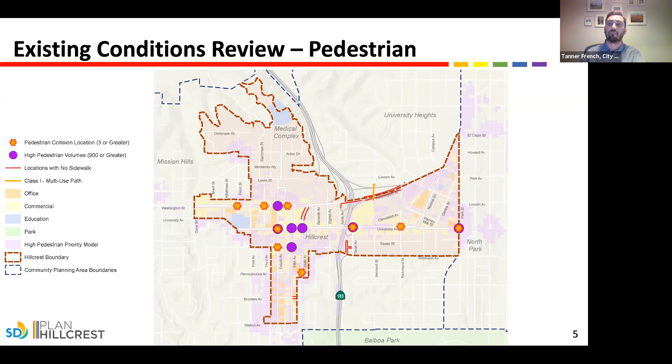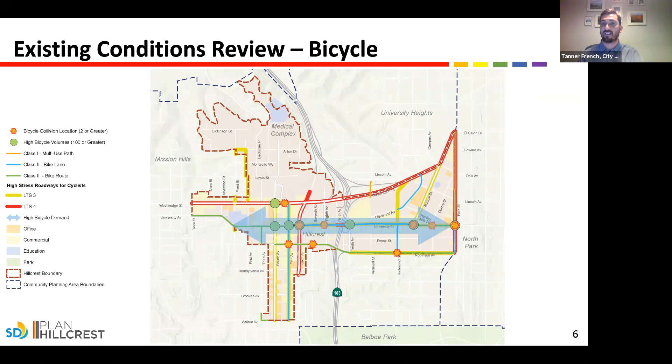Similarly, for the bicycle mode, understanding locations where collisions are occurring, the high propensity for bicycle activity, and where the network may be lacking, but also understanding where other entities like SANDAG are planning and implementing bicycle facilities, so that'll best inform our plan. Next, for the vehicular mode, the existing conditions again will help us identify locations where collisions are occurring and where there's traffic congestion.

Also, existing conditions identify roadway typologies, which help us determine an appropriate long-range makeup. For instance, the characteristics of Washington Street, the large width, the grade separated intersections, the lack of fronting land uses, all help inform ideas about what its future best makeup is.

Chen Ryan staff will delve deeper into that topic later in the presentation.

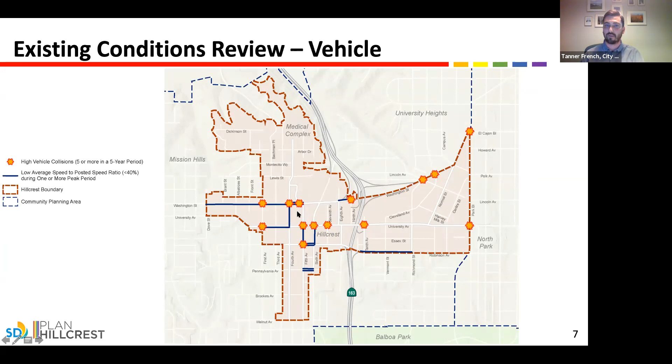Transit is a bit more complicated, given the fact that another entity, SANDAG, plans regional transit, and yet another entity, MTS, operates transit. But a similar process is still used. We look at key metrics like ridership propensity, traffic congestion, and walkshed to inform our future plan.

In this slide, you can see that nearly the entire community, with the exception of a portion up by the medical center, is within a quarter mile walkshed of transit. This means that transit can and should be a viable option for this community.

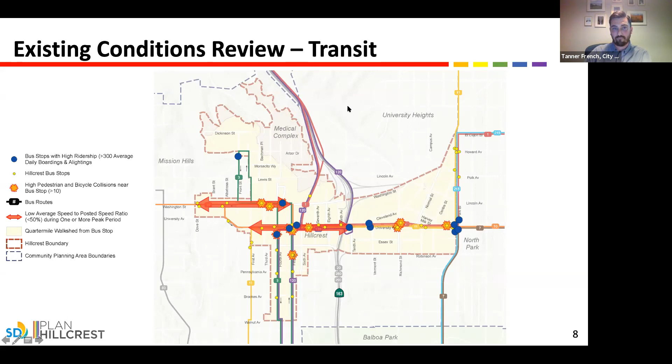This slide depicts planned transit in SANDAG's draft regional transportation plan, which is currently being updated. Along with many of the same treatments, this includes the possibility of a commuter rail, a much more intensive infrastructure. This would have a completely different set of implications regarding how other modes fit in the roadway network and what would be needed at the transfer nodes.

It'll be our job to communicate with SANDAG on this issue and make sure our plan reflects the likely outcomes of their plans and making sure that they're cohesive.

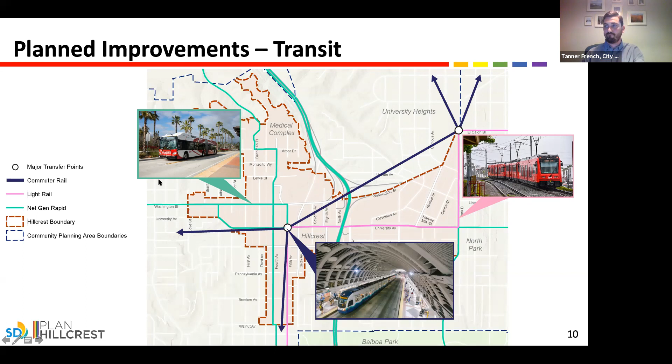With that, let's transition into the mobility approach portion of the presentation. Although each plan update is unique and will be tailored based on unique factors for each community, fundamentally and from a policy perspective, our process is relatively uniform. At its foundation, the mobility planning approach looks to achieve goals identified in other city policy documents.

These documents include the Climate Action Plan, specifically by reducing vehicle miles traveled and shifting commute mode share away from single occupancy vehicle and towards transit and active transportation, thus reducing greenhouse gases. Complete communities, specifically by identifying and prioritizing funding for active transportation improvements in communities that need them most. Vision Zero, specifically by creating modal networks that are safe for all users, including those that are most vulnerable. And finally, the city's general plan and current community plan, where applicable.

With that understanding of the basis of our approach, I'll pass the presentation over to Monique Chen from Chen Ryan and Associates. Monique will start by covering some of the more technical aspects of the mobility planning approach.

Before I pass off, I just want to note that the options and concepts we're going to be showing tonight are at a high level and are just for the purposes of this preliminary discussion. A lot of vetting, coordination, and analysis will have to occur before any of these options would make it into the plan. So with that, I'll pass it over to Monique.

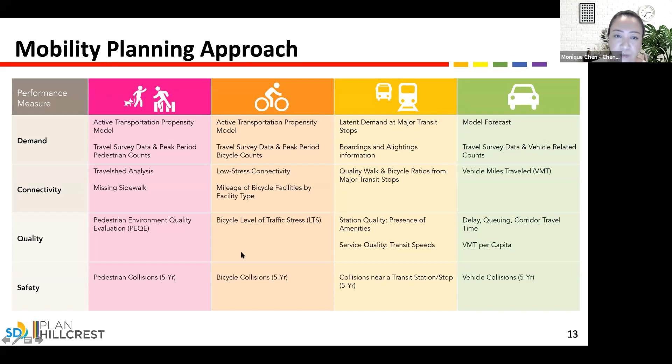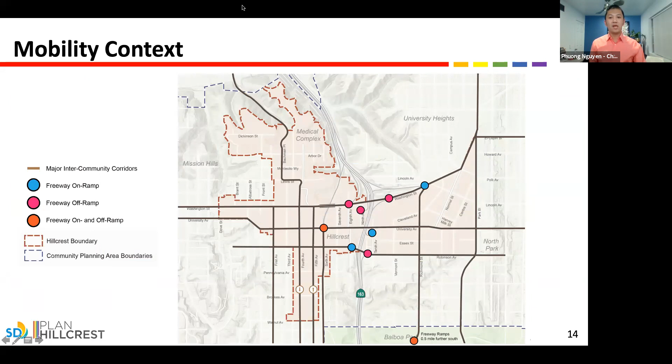Building on the previous slide and the matrix, in order to develop a concept, we look at Hillcrest's network as a whole. As you can see on your screen, we have a grid network in Hillcrest, but it's a very limited grid network with 3 major east-west streets and about a handful of north-south streets, with a few on-ramps and off-ramps focusing primarily along SR 163.

First, we'll look at the north-south streets. There are 3 major corridors that we considered that would provide vehicular access throughout the community, and also inter-community to other communities and freeway access. First, we have 6th Avenue, which provides freeway access and also access to Bankers Hill and downtown San Diego. Whereas Richmond Street provides access to Balboa Park, primarily for residents who live on both sides of Richmond, and also some freeway access via a ramp on the southern side of the road.

Park Boulevard itself provides transit access and intercommunity access, including the existing BRT, but also the planned BRT line straight up and down Park Boulevard, connecting the community to University Heights and further south to downtown. 4th and 5th Avenue we're not discussing because they already have a lot of active transportation facilities in conjunction with the light rail being planned in the draft RTP, so we'll go with the regional plan for those.

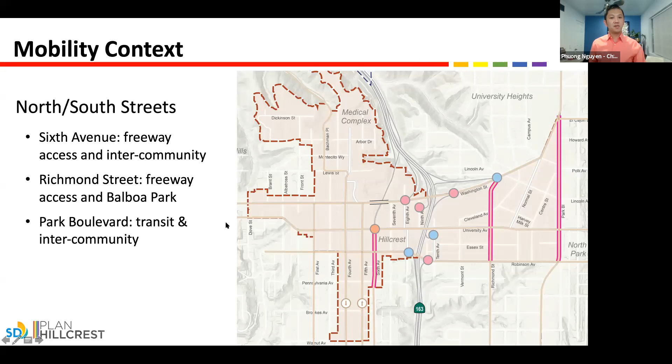In terms of east-west streets, we have 3 major corridors. Washington Street is primarily very vehicular oriented. It has very few facing businesses, a few shopping centers that need full driveway access, and very few front-facing development.

University Avenue, on the other hand, is an active commercial corridor with existing bike lanes as well as high demand for parking and a lot of businesses that operate throughout the day. Whereas Robinson Avenue is designed more like a slow street, focusing on just residential access, multimodal access, but not so much transit.

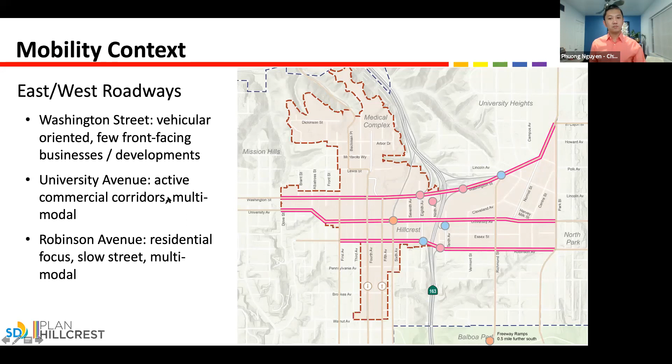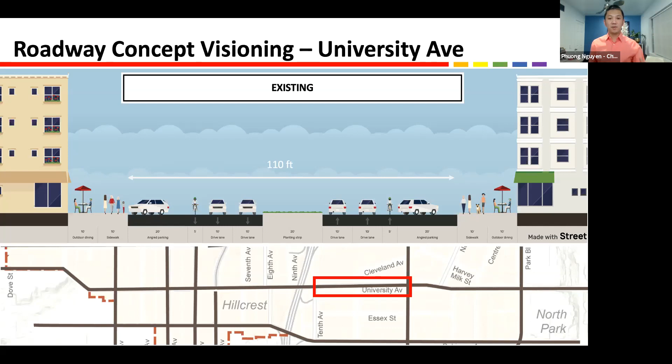In order to evaluate the potential concept today, we'll focus on University Avenue, the section between 10th Avenue and Normal Street. This is also the widest section of University Avenue, with 110 feet curb to curb within certain segments.

Under the near-term conditions, SANDAG is planning to construct a one-way cycle track on both sides of University Avenue, by inching the diagonal parking closer to the vehicle lane, basically doing a swap of the existing condition to provide a safer environment for cyclists. Under the grading criteria, all of the modes remain the same as existing or near-term conditions, with the exception of bicyclists, who see an increase in the quality of the facility.

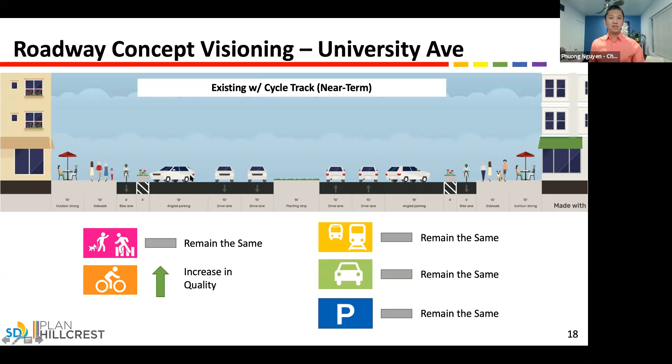For the next 4 options, which aim to maintain the existing vehicular access along University Avenue, under option 1 we would provide light rail or BRT access along the center line of the road with cycle track on both sides, in exchange for converting diagonal parking to parallel parking. Both bicyclists and transit see an increase in quality, whereas there's a slight decrease in parking availability.

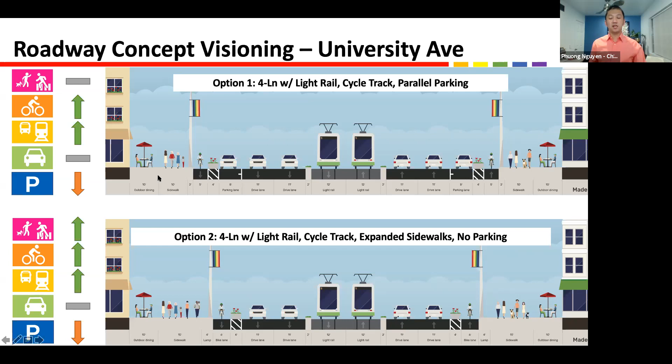Under option 2, it's very similar to option 1, but in exchange for removing parking along University Avenue, we are now able to increase the width for sidewalk and outdoor dining on both sides. Cycle track and transit access still remain the same as near-term conditions.

Option 3 seeks to maintain a balance between all modes. However, when you try to maintain all modes, there is quite a bit of exchange. Parking will be converted from diagonal to parallel, bike and transit will share the same lane, such as the implementation on El Cajon Boulevard right now, and the number of lanes for vehicles remains the same as near-term conditions.

Finally, under option 4, we would provide a transit-only lane on both sides, still providing cycle track, but in exchange parking would need to be removed along both sides of University Avenue. So under these 4 options, there's quite a bit of trade-off between all the modes, and that brings us to our next slide, where we look forward to your opinions on these 4 options.

As the poll pops up, I'll just go over the options again. Option 1 would convert diagonal parking to parallel, and in exchange we gain additional space for an exclusive transit lane. Option 2 gains more space for pedestrians, but we remove parking on both sides. Option 3 is a transit and bike share option with parallel parking; this is the option where we seek to balance all modes, granted not all of them are quality facilities. Option 4 would remove parking to provide spacing for cycle track and an exclusive transit lane.

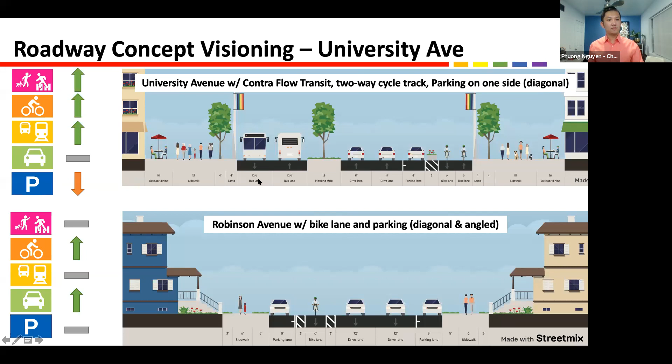Next slide, please. And it's time for the next poll. We would like to see how you feel about the couplet concept.

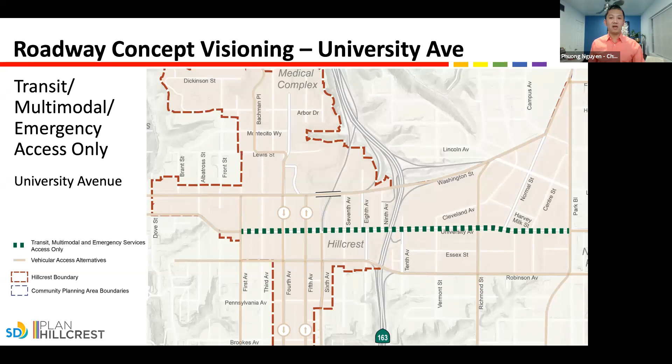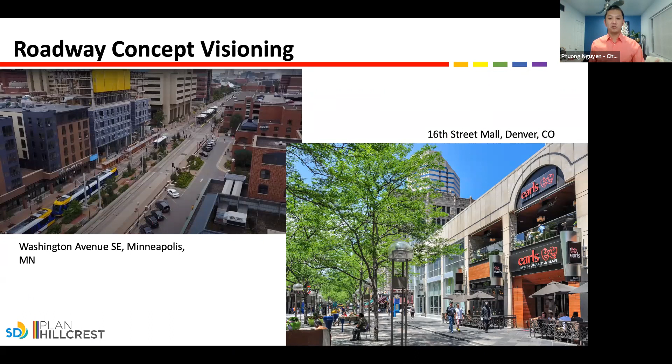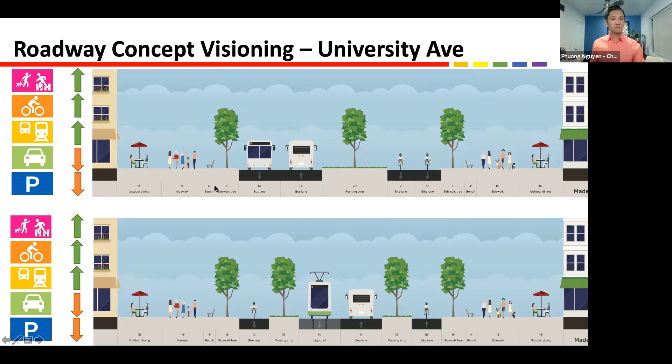Next slide, please. It's time for our next poll, to see how the audience would feel about converting University Avenue to a transit and active transportation only corridor. We understand there will be some challenges along this corridor as well, especially tight crossing space, such as across the 163. But this is a concept, and a vision we'll carry through as we analyze all the corridors throughout Hillcrest.

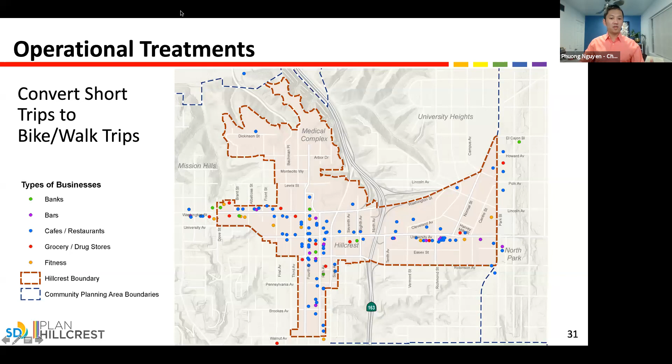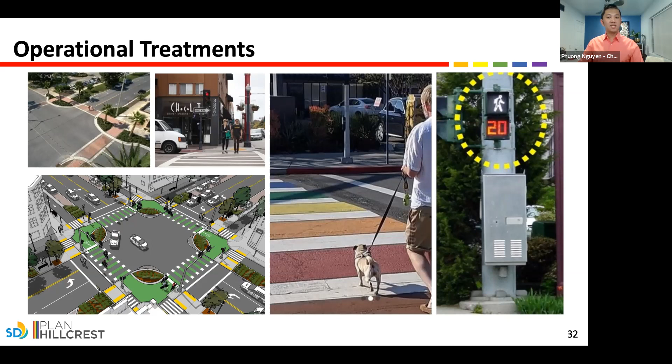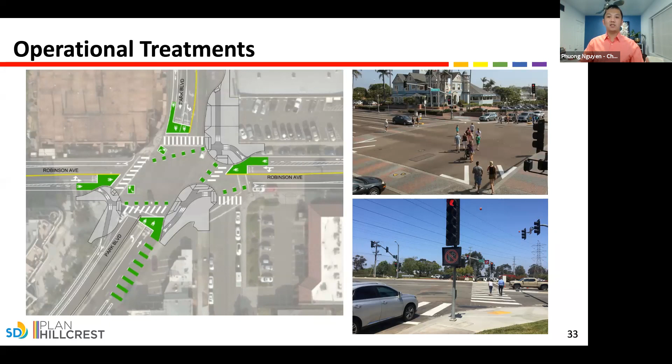Other treatments we will consider include pedestrian scramble, which was first implemented in Gaslamp Quarter but is now implemented throughout San Diego County, especially in areas with high pedestrian demand. To supplement this, we would include things such as a blank-out no turn on red sign. These signs would work in conjunction with the pedestrian scramble or an LPI to ensure a safer crossing environment.

Next, please. In order to improve pedestrian conditions, especially in Hillcrest where there's a lot of nighttime business that opens late, we will also include pedestrian-scale lighting. This is not just for the businesses, but also along residential corridors, to increase visibility and a safer feeling for people who need to walk to and from their businesses or residences at night.

Next slide. Lastly, this concept has been introduced by SANDAG: the mobility hub. Under this concept, the mobility hub would provide not just high quality waiting areas for transit services, but also storage space for first and last mile micromobility such as scooters or bikes, as well as docking stations for the Hillcrest shuttle.

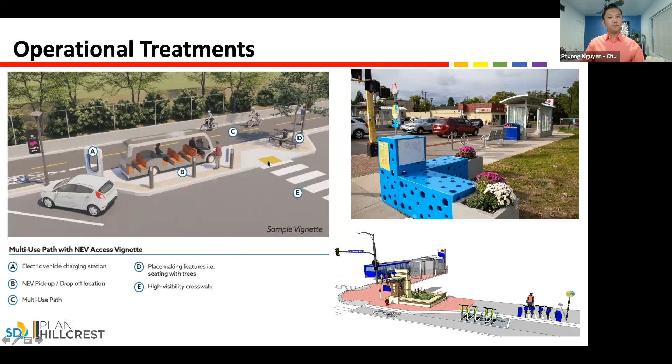Next slide. We heard you from the last meeting regarding the usage of alleyways throughout Hillcrest. We understand that alleyways throughout Hillcrest are not a one-size-fits-all approach, and we cannot just activate everything because some alleyways, such as the one behind Ace Hardware, provide access and loading area for businesses, whereas other alleyways are primarily used as just garage access for residents. So as we go through this process, we will identify the purpose of those alleyways and what level of activation can be done to them.

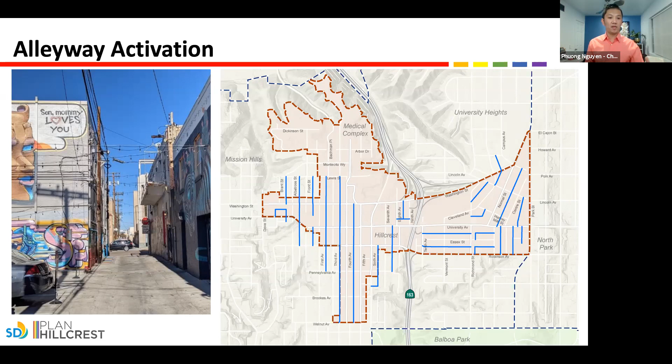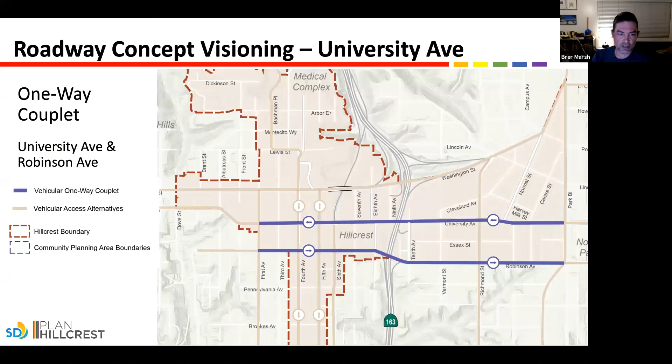No problem, thanks a lot. These are really great options. There's some really forward-thinking stuff going on here. When I first looked at the presentation, I was really excited about the possibilities of some of these different configurations. I've said before that the only way to change the character of the neighborhood for the better is to change the way that space in the right of way is distributed.

I'll just repeat that I think the designs we've been left with come from the old way of thinking about the neighborhood, which is bringing a ton of cars in on the freeway to go to the Sears and to come in and go to restaurants, moving people around and giving them all tons of parking.

I think those are the source of a lot of our problems: the blight, the storefronts that are boarded up, the homeless problems. A lot of these things are because it's not comfortable walking around in many parts of the neighborhood.

And I think that when we start to shift these things, we'll be inspiring change, and we'll be inspiring other people to come through and use their bike or use transit. As we provide opportunities for these other modes, parking will be less important. And ideally the density will grow up with it. It's not going to happen 100% one thing, then 100% the other. It's all going to grow together.

And that's what I love about looking at these plans, is I can see in the different road configurations stages that we can mature through.

There were a lot of things said that I would like to just support that Clint had said and that Roy had said, and they're all right. So I won't go on about it, but really my guiding ideal for what I'm looking at is that everyone should have the right to live in a place that is healthy, socially just, aesthetically pleasing, and rewarding to live in.

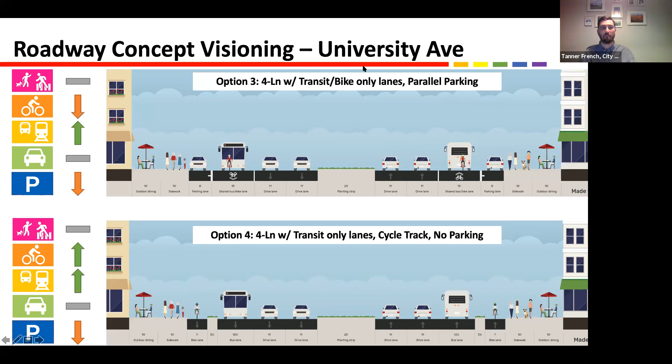Sounds good. Thank you, Tanner. I'll skip ahead to the end just to preview the next meeting and sort of look ahead. Again, want to echo what Tanner said, thank you all for your time and for your input. Our next meeting is Thursday, February 18th, same time, 6:30 p.m. The topic will be the land use and building design and building form. So we'll be talking about land use, urban design concepts, and getting your feedback on some preliminary options.

At the March meeting, we'll revisit our parks and public space concepts, refining the information that we received from the group at the December meeting and presenting some revised concepts. And then we'll come back, I believe it's the April meeting, with - it'll be April or May for the mobility meeting - but we'll have that schedule presented as part of the next month's meeting as well.